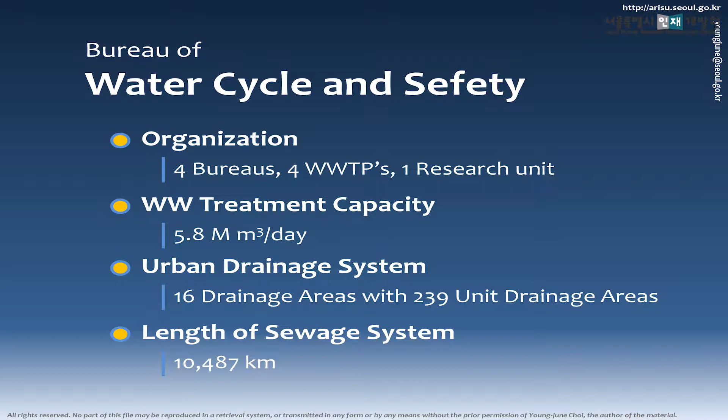So it has the same problem. When the economy grew fast, a bigger plant was good for treating wastewater because we could reduce the treatment cost. But right now we want to control quality, and that's hard with a big one, right? Do you remember we had 4.5 million cubic meters per day of capacity for drinking water? Wastewater is 5.8 million cubic meters, and the sewage system has a length of 10,000 kilometers.

Why? Do you remember the precipitation pattern of Seoul? It's squeezed into the rainy season, right? So 2/3 of annual precipitation is concentrated in 2 months. So usually we don't have much stormwater.

There's a terminology called Q. 1 Q means the treatment capacity of the wastewater treatment plant. So if the flow of wastewater plus rainwater is 1 Q, that water goes to the treatment plant. If it's 2 Q, meaning more rain, it still goes to the treatment plant. But 1 Q is the capacity for full treatment, so that 1 Q is treated, and the other 1 Q is preliminarily treated, mixed, and discharged to the river. At 3 Q, with even more rainwater, it still goes to the treatment center too.

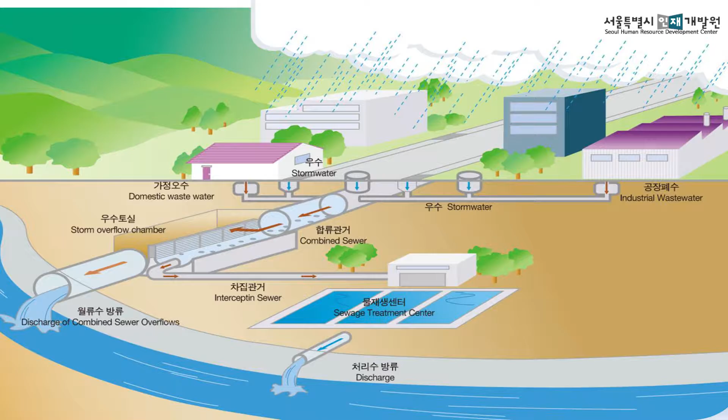The first flush of stormwater in an urban area is very bad because the road is dirty, and the initial rain washes off that dirt. So 1 Q is bad, while 2 Q and 3 Q are relatively clean, so 3 Q can go directly to the river. But the event where overflow exceeds 3 Q in a year in Seoul is very rare. That's why the combined sewer system is more efficient for Seoul. 87% of the sewer system in Seoul is combined.

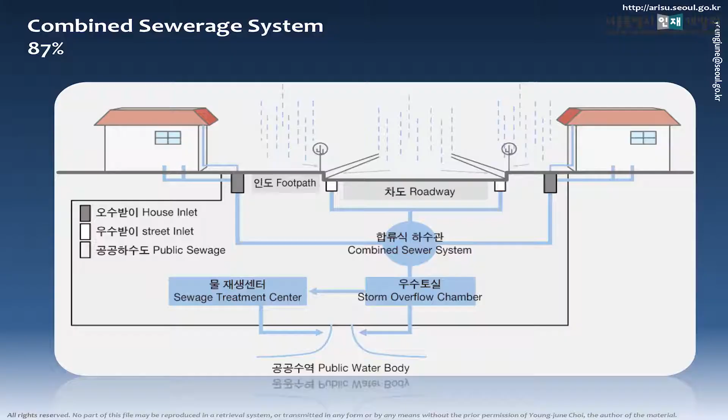And we have new communities, new cities. In that case we use a separate system, so that accounts for 13%.

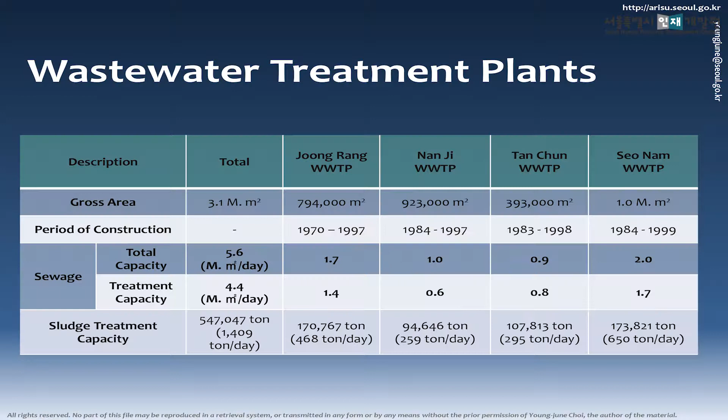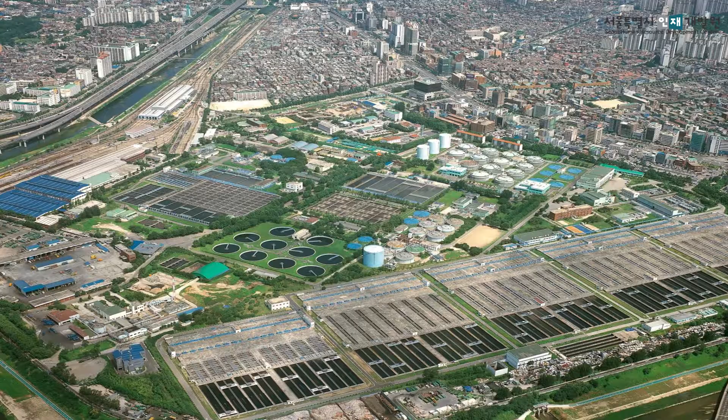Take a look at the size of the plant. This is the second largest one. You can see this wastewater treatment plant, and you can compare the size of the plant with the community and buildings around it. It's huge. Most of the water demand, 87%, comes from domestic use in Seoul, because we don't have much farming or factories in Seoul. I also calculated the water balance.

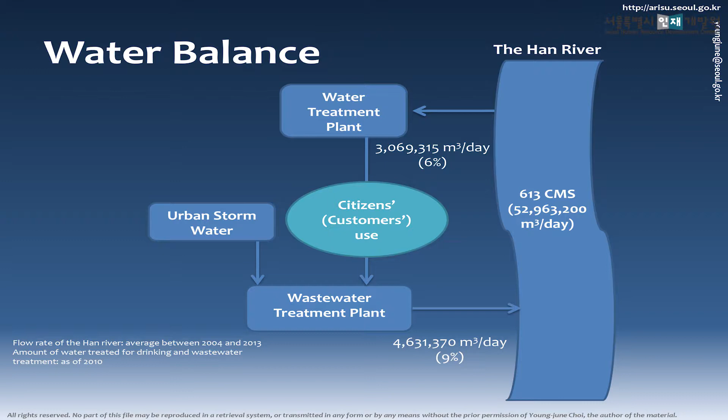This is the Han River. CMS stands for cubic meters per second, a measure of flow. I averaged it over 10 years, from 2004 to 2013. The average water flow of the Han River is 600 CMS, and about 6% of the Han River's flow is taken for drinking water treatment. Citizens use it, and it goes to the wastewater treatment plant along with stormwater, so about 9% is returned to the Han River.

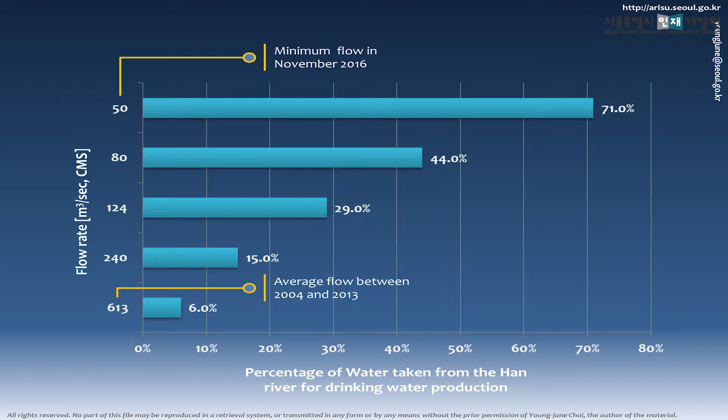If the flow of Han River is 600 CMS, then 6% is used for drinking water for the citizens of Seoul. But the flow decreased to 200, then 100, and in November 2016 it went down to 50, meaning 10%. In that case, 70% of the Han River is taken to make drinking water. So the city was about to warn of an emergency just before that.

But luckily we had rain. So we made many promotions and campaigns like 'let's save water, let's use rainwater,' something like that. People listened to us, but after we had rain, nobody listened to me. Anyhow, we had the problems at that time.

So the city found out that we need another alternative water source, like recycled wastewater or rainwater or something like this. Right now, for water recycle and reuse rate in Seoul, there are 3 categories. One is wastewater reuse, the other is rainwater use, and the last one is gray water.

Do you know what gray water is? When you use water at your house, toilet water is separated. The other water, like shower or dish washing water, can be reused with small preliminary treatment. We can use that water again, like toilet water. So that's gray water. So 3 categories: recycled wastewater, rainwater, and gray water.

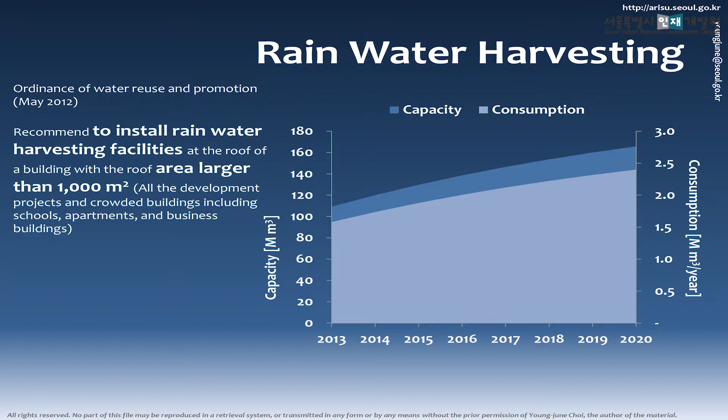So the city made a plan to increase the reuse rate to 14% from 4%. Part of the plan is to increase rainwater harvesting. To do this, we support citizens to install green infrastructure like passageway pots and green roofs, and sometimes the city supports 90% of the installation cost for rainwater harvesting barrels.

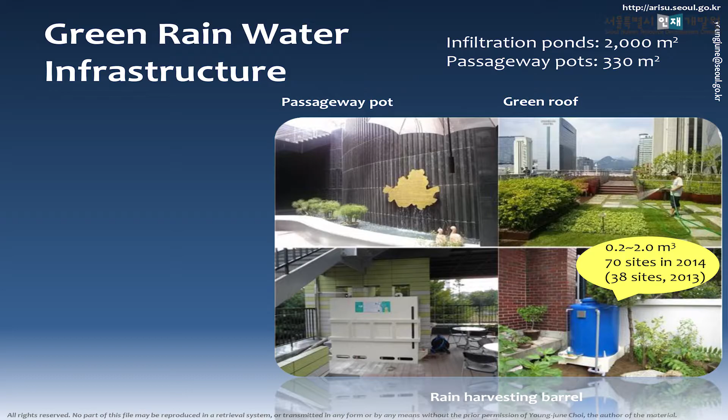But as you can see, only 70 sites installed that system. Why? Installation support of 90% is good, but the owner still had to pay the operational cost, and operational cost is more expensive than tap water.

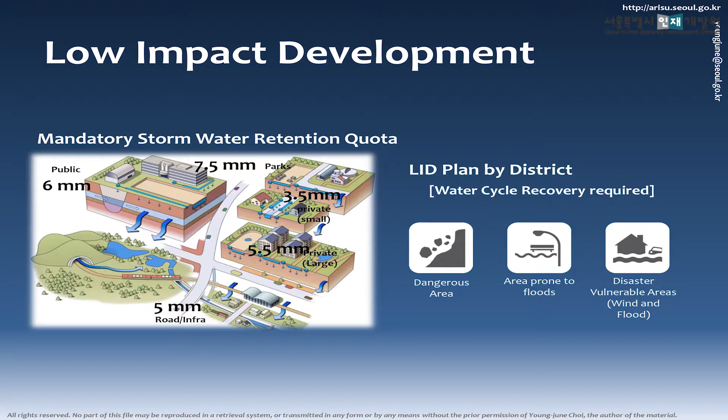Actually, there is a building code in Seoul, in Korea. If you want to build a certain size of building, you have to have a rainwater harvesting facility. If you want to build infrastructure like a public park or private structure, you have to have a certain facility to store rainwater - for a private structure, you have to store 5.5 millimeters of rainwater, something like that. That's the low impact development regulation.

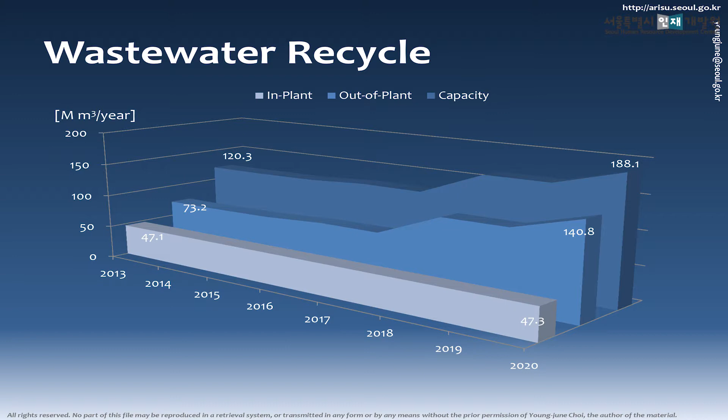We have also planned to increase gray water reuse, and we have planned to increase wastewater recycling. But wastewater recycling is very hard to expand because of the production cost - the treatment cost for wastewater recycling is much higher than the production of drinking water. But anyhow, we have planned to increase it.

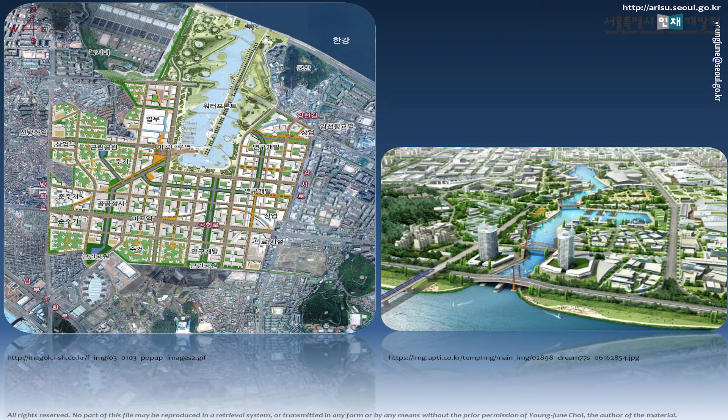Again, this is Seoul, and this is the second largest one. This is the largest one - remember this - and this is Han River. This is the wastewater treatment plant, the largest one. Seoul just finished building another small city just near the plant.

When we built this community, we installed 2 lines of water supply - one for drinking water, the other for the recycled water supply system. Landscape management and road washing will use the recycled water from this plant, so we can increase the water reuse rate.

Urban drainage system: we have an integrated monitoring system and a hydrological information system. The hydrological information system is very important because we can have a prediction system for the time for a flood to arrive at the city, something like that.

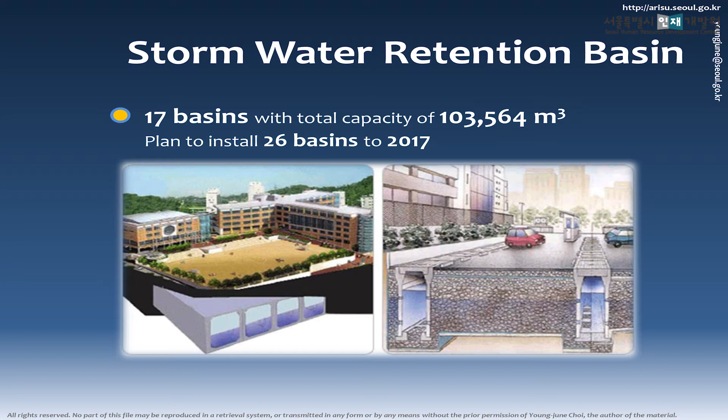So we have the hydrological information system, and we have stormwater retention basins underground, under structures. If it's a school, we have an underground stormwater retention basin, and even the road has basins under it. We have 17 basins with a total size of 100,000 cubic meters. With these basins, we can reduce the peak of a storm.

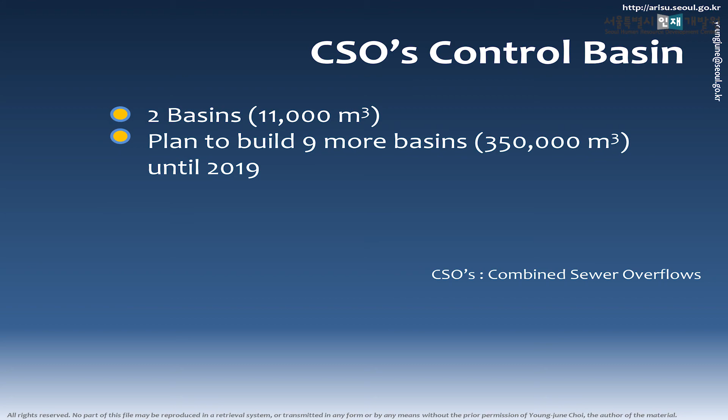So we have 2 basins of 11,000 cubic meters, but the city has planned to increase it to 9 more basins.